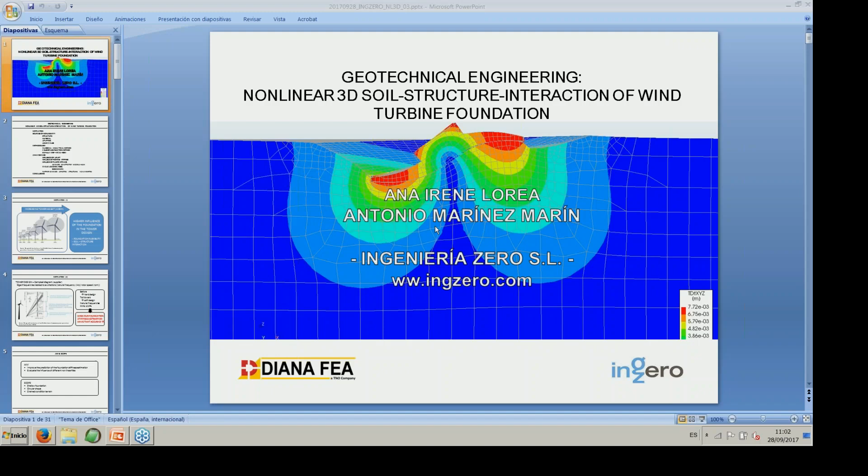As you have said, in Ingeniería Zero, we have been working for several years on wind turbine tower and foundation design. And during this process, we have come across some problems or decisions to be made based on the accuracy of the estimation of our foundation stiffness.

So let's start with the index of the presentation. I will talk about the motivation of this study, the different sources of non-linearities, the different methodologies we have, both analytical and numerical. Then we'll go on an analysis case we have done for this presentation, in which we can see the influence of different factors like uplift, the footing stiffness, the influence of plastic strains, in which we'll present the study with some advanced soil constitutive models, cyclic loading, and structural nonlinearities. And after we'll go through some conclusions.

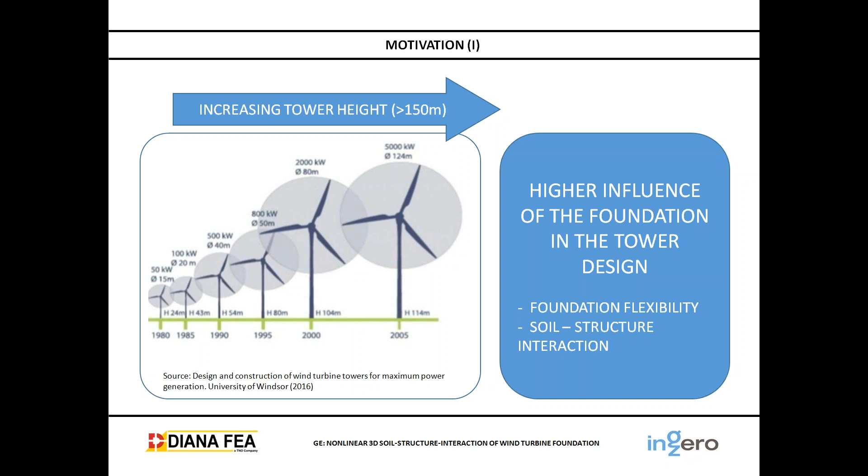Just a little note, when we start our tower and foundation design, the supplier gives us the Campbell diagram. In the Campbell diagram, we have the eigenfrequencies related to the excitations. We normally have the rotor speed, and we compare with the natural frequency of our tower.

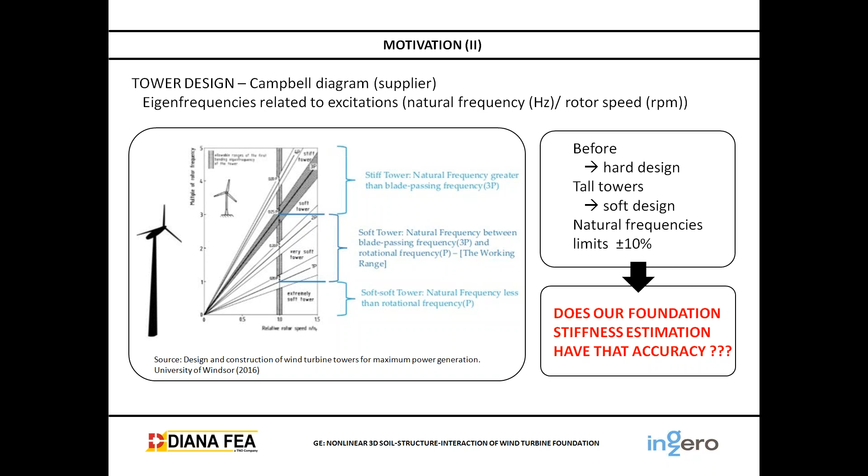Before, we had the hard design in which the frequencies were over the resonance frequency of the rotor, but as the height of the towers has increased, we have gone into soft designs because we couldn't make such stiff towers. And also the margin we have in this estimation of natural frequencies from our structure is plus minus 10%. So with such a small margin and such flexible towers, does our foundation stiffness estimation have that accuracy? We wonder, because as the influence of the foundation grows, are we near that 10%? How does our stiffness influence the accuracy of that frequency?

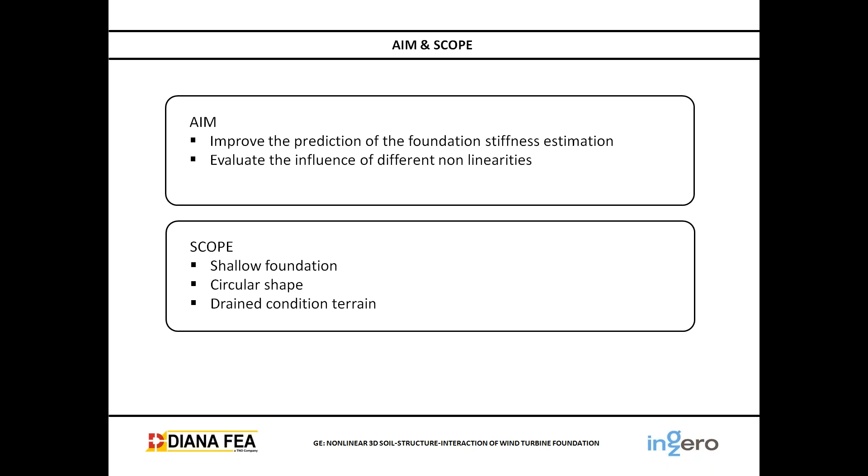So the aim of this webinar is to improve the prediction of the foundation stiffness estimation, to evaluate the influence of different nonlinearities, and our scope is a shallow foundation, a typical wind turbine foundation with circular shape and in drained conditions.

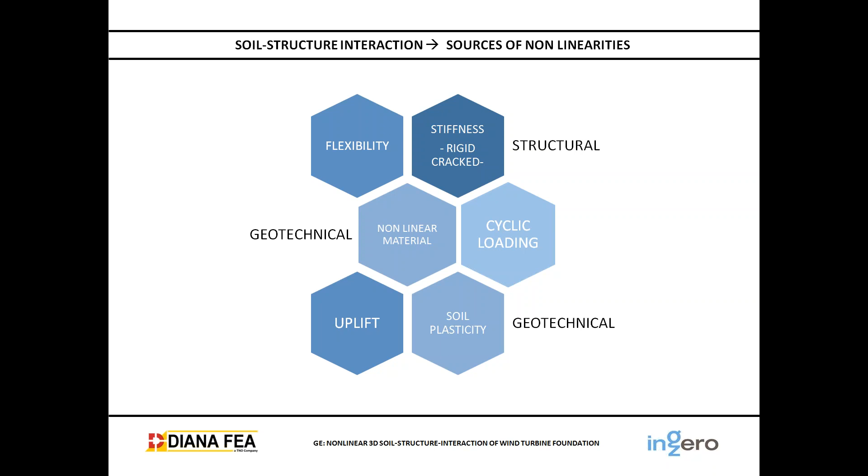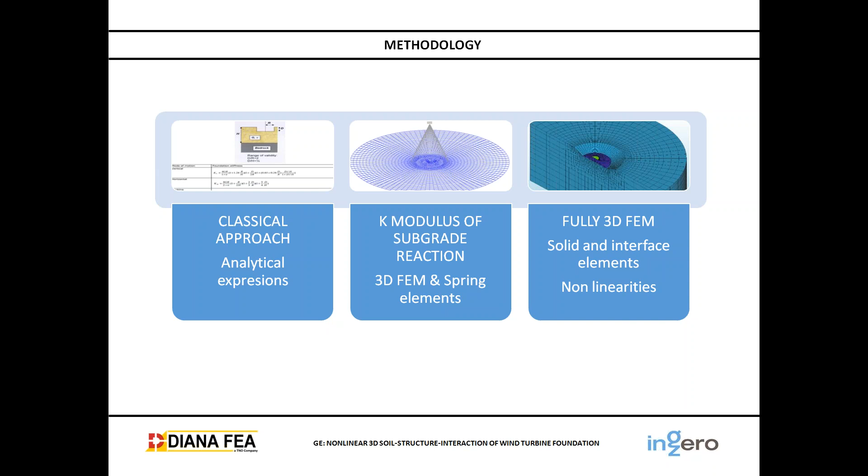Which methodologies do we have, or how do we face that problem? Normally, we have the classical approach, which is an analytical expression found in all guides and standards. We have three methods: the analytical one, which is the classical; the second big group, in which we consider the 3D FEM models, and in it we have two subgroups. One in which we represent the terrain with the modulus of subgrade reaction, by spring elements, and the fully 3D FEM, in which we represent it with solid elements and interface elements. We represent the interface between soil and structure, and it can include all the nonlinearities, general shape of the foundations, construction process, etc.

So let's have a quick look at the classical approach. Here we have an example of the DNVGL guide. It's based on an analytical expression, and it's included in standards and guides. The variables we use to represent the foundation and the terrain are the equivalent dynamic shear modulus and the Poisson's ratio, and of course, the foundation geometry. The pros of this method are that it's very simple and fast, and you can have a direct measurement of soil parameters in order to determine the parameters you need to use the method.

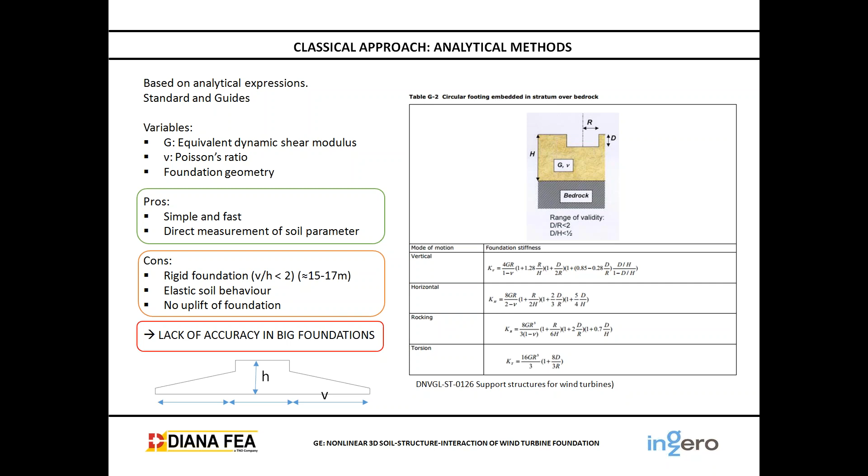The cons: it is for a rigid foundation. We know that a rigid foundation has a relationship between the depth and the dimension of the cantilever of around 2. So it's valid in the range of footings of 15 meters. But nowadays we are reaching 19, 20, 21 meters. The other con is that you consider an elastic soil behavior, and it doesn't consider the uplift of the foundation. So we can say that it has a lack of accuracy in big foundations.

On the methods that use the modulus of subgrade reaction, we introduce spring boundary elements which are based on that subgrade reaction modulus. We can either use shell or solid elements. The variables we introduce are the modulus of subgrade reaction and the foundation geometry. In these methods, we can include the stiffness of the foundation itself.

The pros: it considers the uplifting, because we use gap elements or spring elements with a gap. It has nonlinear behavior. It has a low computational cost. On the cons, we have to obtain the subgrade reaction modulus by correlations, so we don't have the terrain represented by a direct parameter measurement. And also, as it's based on correlations, we have the scale effects on the test. So sometimes we need to calibrate that model.

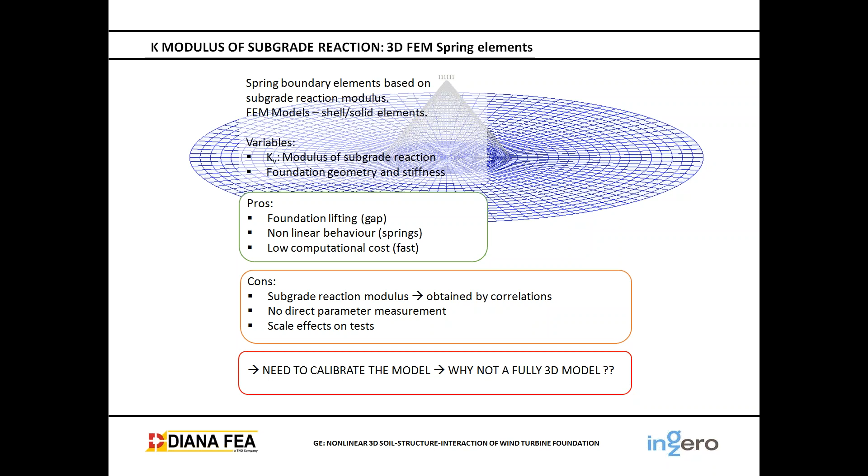So if we need to calibrate the model, why not use a fully 3D model? So let's go to the 3D model. These models, as we can see here in the image, done with DIANA, are based on a finite element model with solid elements, with which we represent the terrain and also the foundation. We can see here in different colors all these elements, and we introduce interface elements between the structure and the soil, and we model or simulate the soil with constitutive laws.

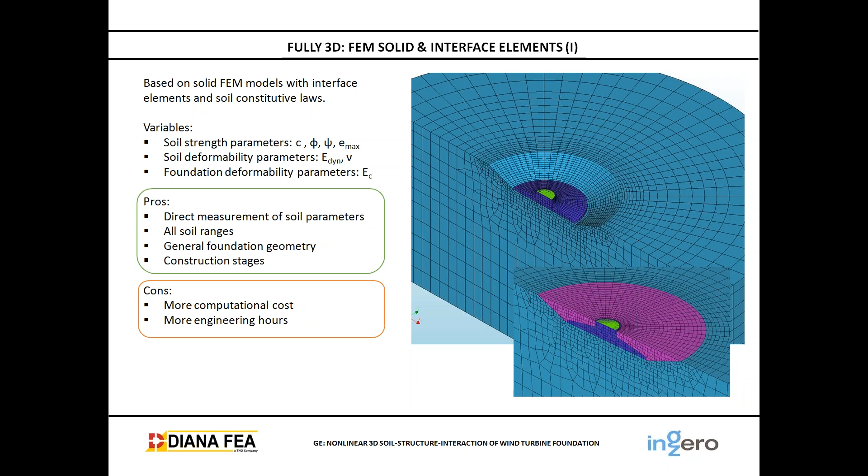Here we have the variables we use: the soil strength parameters, the soil deformability parameters, and we also include the foundation deformability parameters. The pros of using this method are that we can define the parameters of the soil with direct measurement of soil parameters with testing. We can use it in all soil ranges. We can have a general foundation geometry, and we can also include the construction stages. The cons could be that it has more computational cost and you need more engineering hours to do it.

What about the constitutive laws we can use in these 3D models? We can use a lot of them, but what we have used in this study are two different models. The Mohr-Coulomb model, which is an elastic, perfectly plastic soil behavior model. We have here the graph which represents the behavior of the soil and the parameters we need to define it.

The cons of using this soil model are that it has a constant load and reload modulus, as we can see in the graph. The modulus should be adjusted to the operational range you expect. As we know, in turbines, we have different ranges of loads, the initial ones, the maximal, the operational ones, and this soil model adjusts better with sands soils.

There is another advanced soil model, which is hardening soil small strain, which has a nonlinear stress-strain relation. Here we have the graph which represents the behavior of the soil, and the cons we can say about this model are that you need more geotechnical testing in order to define the parameters.

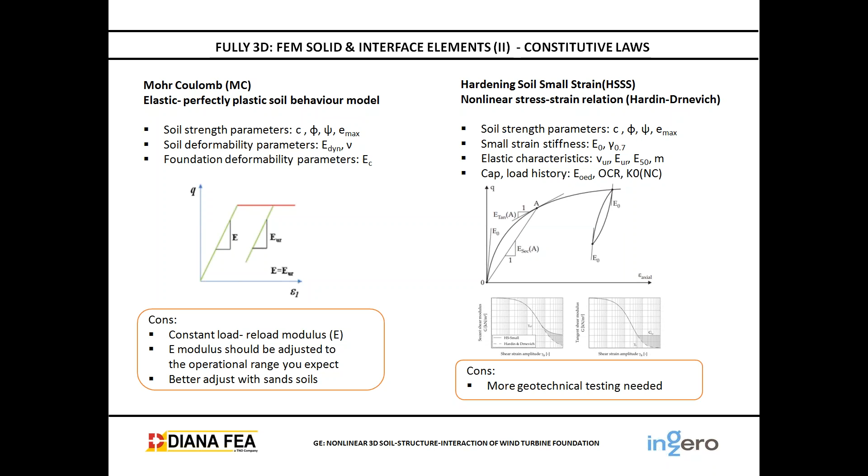So here we have a matrix in which we compare the three different methods with the different nonlinearities we believe are important when designing a foundation. We have the classical approach, which does not consider gap or uplift, nor the foundation stiffness, nor the soil plasticity, nor cyclic loading. We have the modulus of subgrade reaction method, in FEM models, that considers the gap and uplift and the foundation stiffness, but doesn't consider soil plasticity nor cyclic loading.

Then the fully 3D FEM models, depending on the constitutive law of the soil: we have Mohr-Coulomb and hardening soil small strain. Mohr-Coulomb doesn't include cyclic loading because it has the same modulus for loading and reloading or unloading, and hardening soil small strain has all the nonlinearities included.

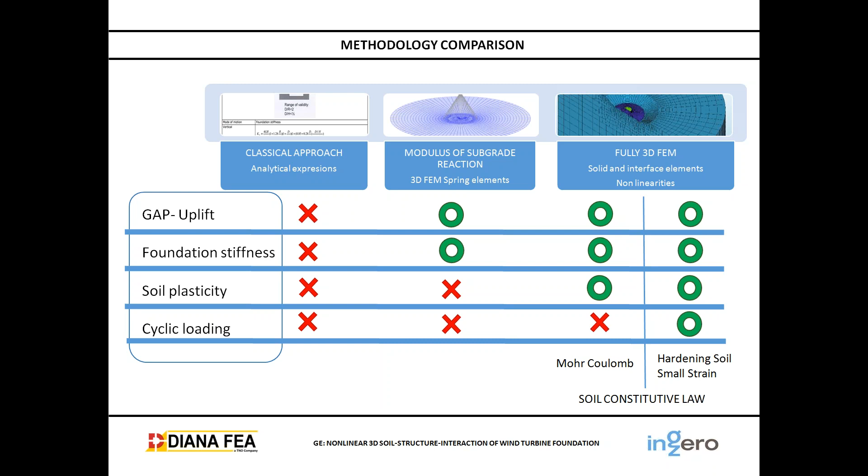Here we have made a summary of the methodology comparison, the things we have talked about before. The pros of the classical approach are that it is simple and fast, and you determine the parameters with direct measurement, but it lacks accuracy in big foundations. With the subgrade reaction, we obtain the subgrade reaction modulus by correlation, so sometimes we need to calibrate the model. And the 3D model: we have the cons of Mohr-Coulomb, but with hardening soil small strain, it is just more time consuming.

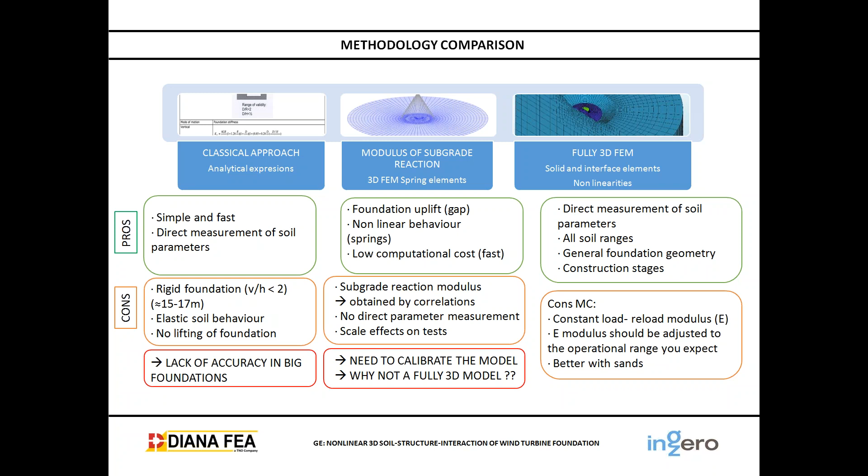So let's move to the analysis case we have made.

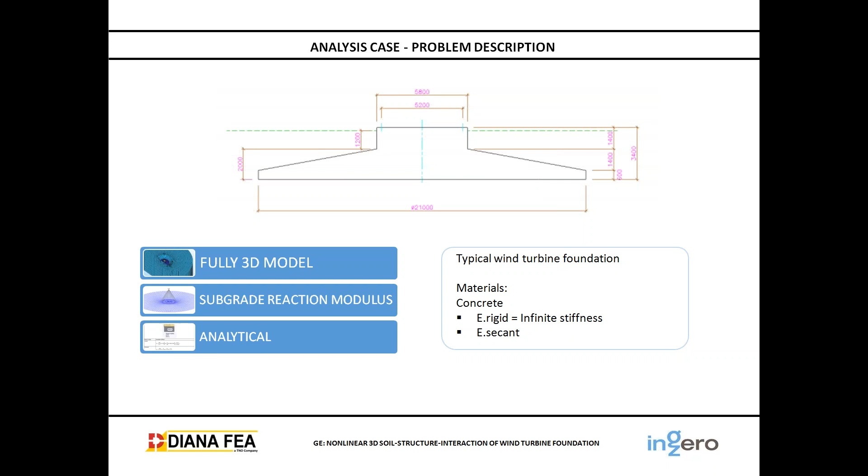Okay, we have simulated a typical wind turbine foundation, a circular one with 21 meters, and the material is reinforced concrete, and we have studied its behavior with infinite stiffness of the foundation, or the secant, which is the elastic one. Now we study the different nonlinearities of the different factors with the different models.

So what about the influence of the uplift of the foundation? Here in the graph we have the moment versus the rotational stiffness. We have a simple line, which is the determination of the rotational stiffness with the analytical method, and now it is compared with the subgrade reaction modulus method. The blue one is considering the rigid foundation, and the orange one is considering the flexibility of the foundation.

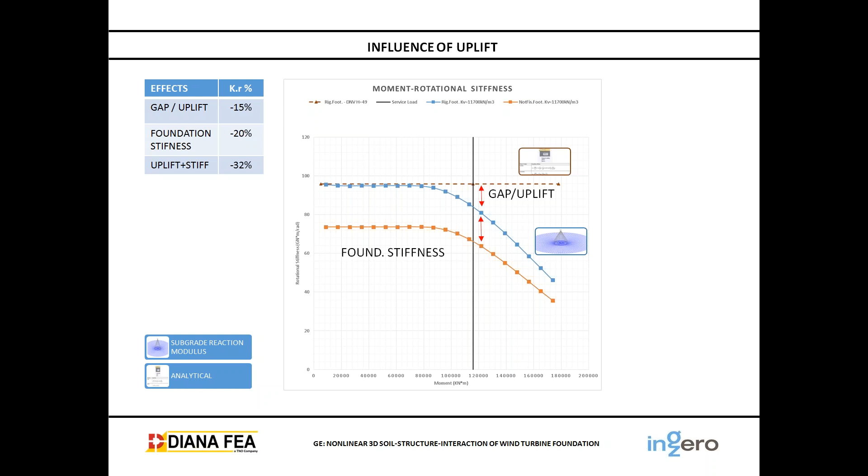So we have the Young's modulus of the concrete. We can see here the decrease of the rotational stiffness. If we consider the gap or the uplift, it has a 15%. If we consider the foundation from rigid to flexible, we have a 20%, and in total, the comparison between using the analytical and the flexible nonlinear spring support base, we have 32% of error determining that rotational stiffness.

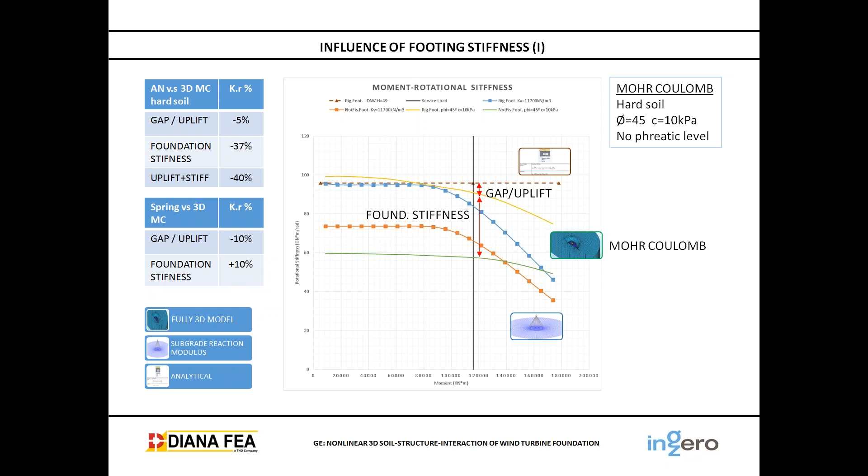So what we are observing here is that it is much more important to consider the footing stiffness than the gap or the uplift. But what we can say is that with the analytical method, we are overestimating the rotational stiffness up to 40%.

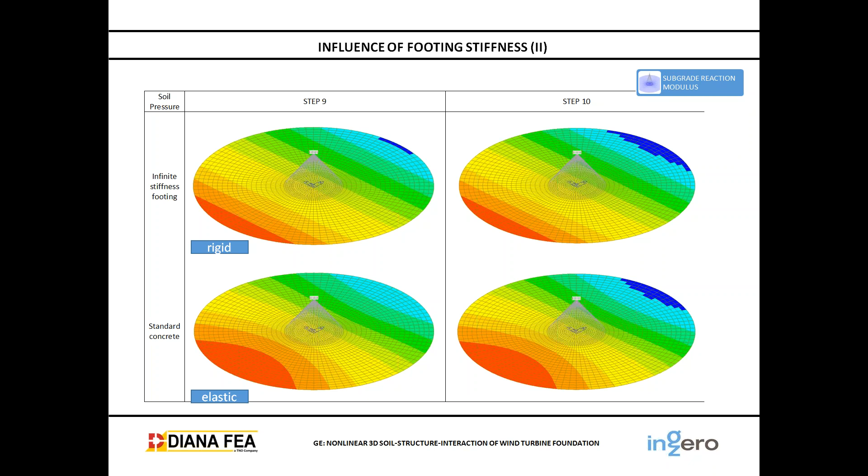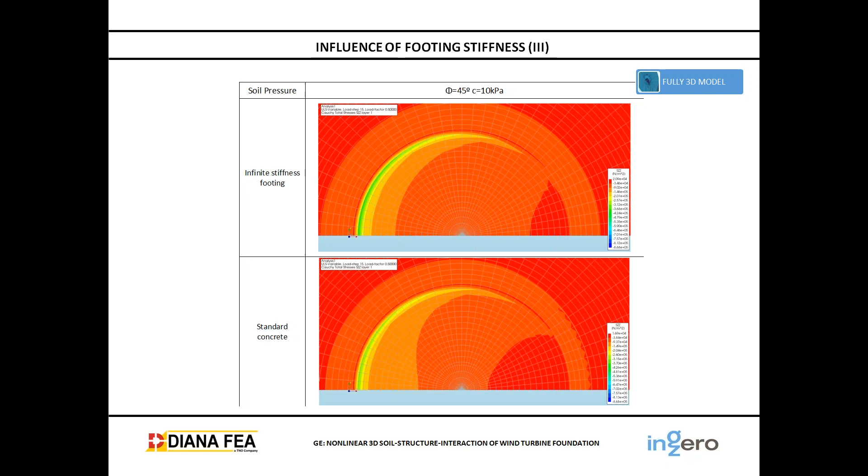Here we have some images with DIANA with the pressures in the footing. The two first images are with infinite stiffness, so a rigid foundation, and an elastic foundation. We can see how the pressures on the soil change by considering the flexibility. Here we have the Mohr-Coulomb 3D full FEM model, with infinite stiffness and with elastic footing.

How does the plastic strain influence? Here we have included the plastification or plastic behavior of the soil by considering a medium soil. So these are the results. In the graph, we can see the results of full 3D methods with a Mohr-Coulomb for a hard soil and medium soil, and with a rigid foundation or a flexible foundation.

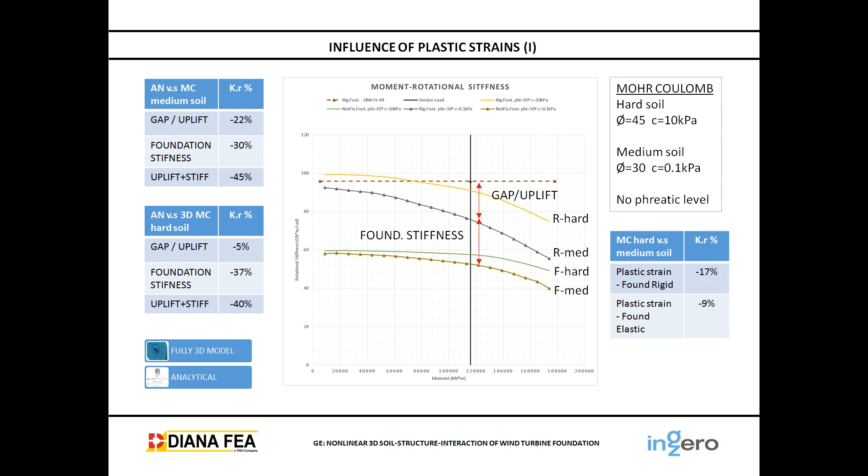We have here the graphs, and the variation versus the analytical one. We have 22% from the uplift, 30% from the foundation, and a total of 45% decrease of the rotational stiffness. That was with the medium soil; with the hard soil, we have 5%, 37%, and a total of 40%. So we are around a 40 to 45% decrease in our rotational stiffness estimation.

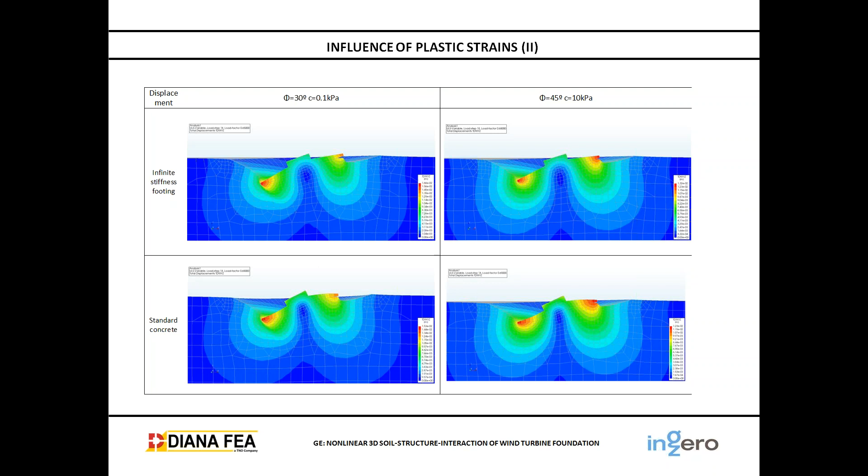Here we can see some images of the results obtained by DIANA. In the upper part of the slide is the infinite stiffness footing. We can see how it maintains its plane, and for a medium and a hard soil with a flexible concrete, we can see how the flexibility and the deformation influence the deformation of the system.

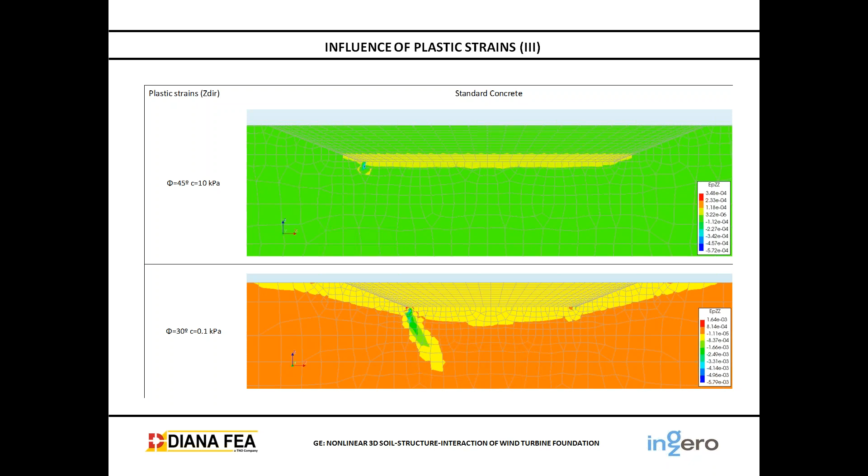Here we can see the evolution of the plastic strain in the terrain for a hard soil and for a medium soil. Maybe the difference between the values is not very high, but we can see how the plastic strain propagates in the soil.

And here a full 3D model, but using advanced constitutive models, which is a hardening soil small strain. In the graphs we have included the orange one, the model with spring elements; you can see on the right side the hardening soil. The blue one is the hardening soil with a hard terrain, and the green was the Mohr-Coulomb.

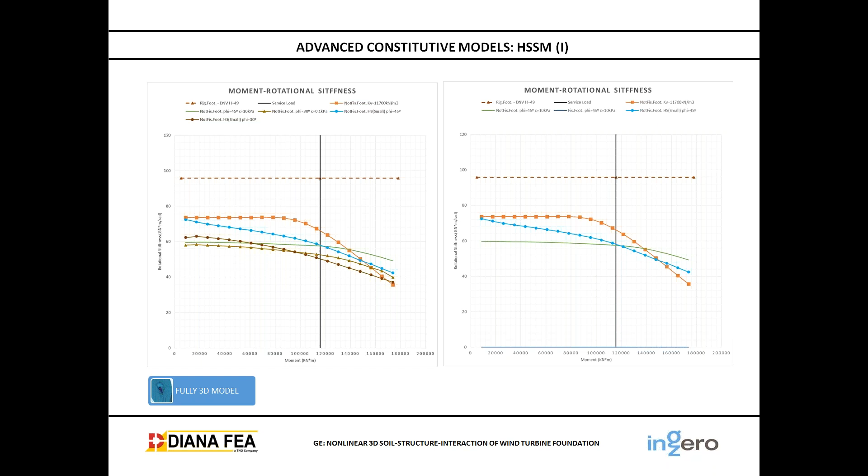We can see that in the beginning, for low moments, the behavior is quite different, but from the service loads, the black vertical line, which is the operational moment or operational load, it has a very similar behavior.

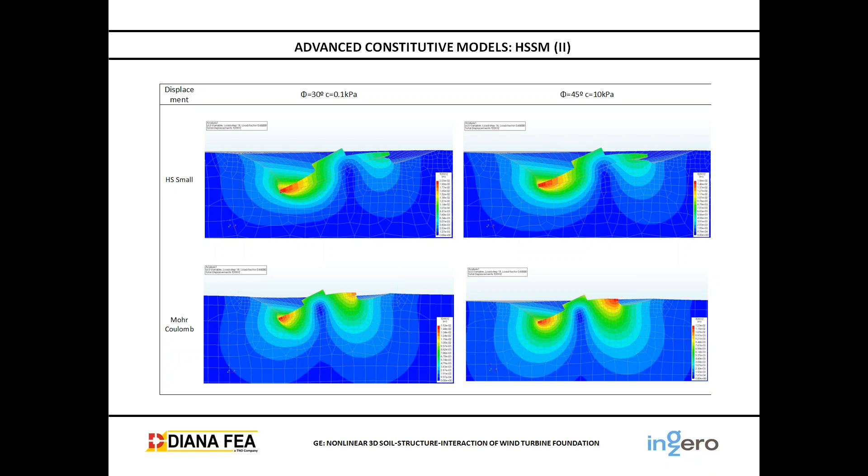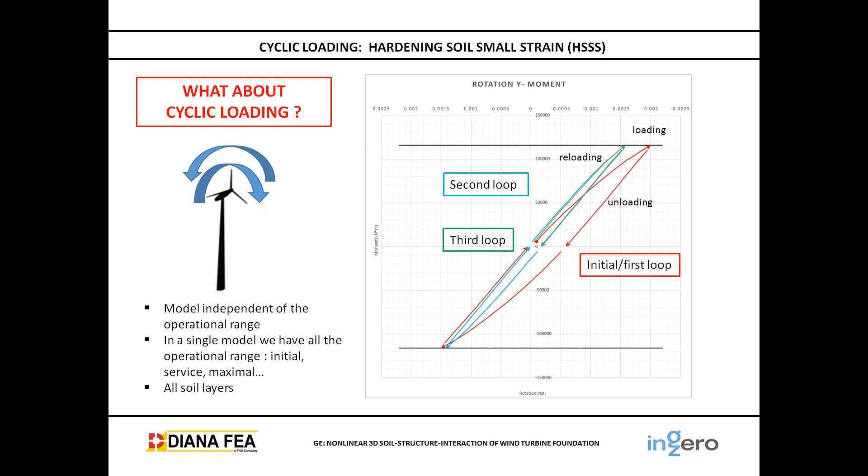So what's the point of this? That we have in a single model the whole operational range, the initial, the service loads, and the maximums, and we can have all the soil layers. So we have a model which is independent of the operational range. That's quite good because it seems that we have solved our problem. But now, how can we believe that? We can't just say that it's true. So how accurately can cyclic loading be predicted? Let's do a benchmark in order to know how accurate we are.

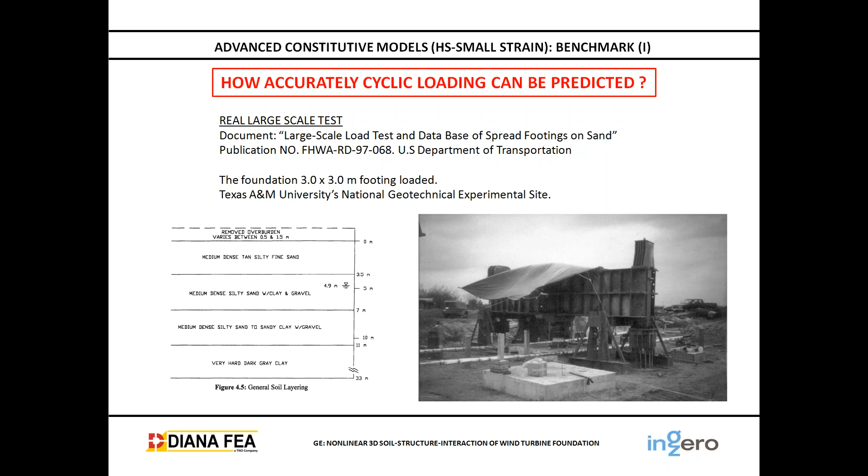We have taken a real large-scale test, documented in "Large-Scale Load Test and Database of Spread Footings on Sand" from the US Department of Transportation, which is a foundation of 3 by 3 meters, and it has been loaded according to that image. It has this soil layering, and we have made the same. We have reproduced and simulated that test with Diana. We have introduced the same general soil layering, and we have loaded, reloaded, and made the cyclic loading they have done.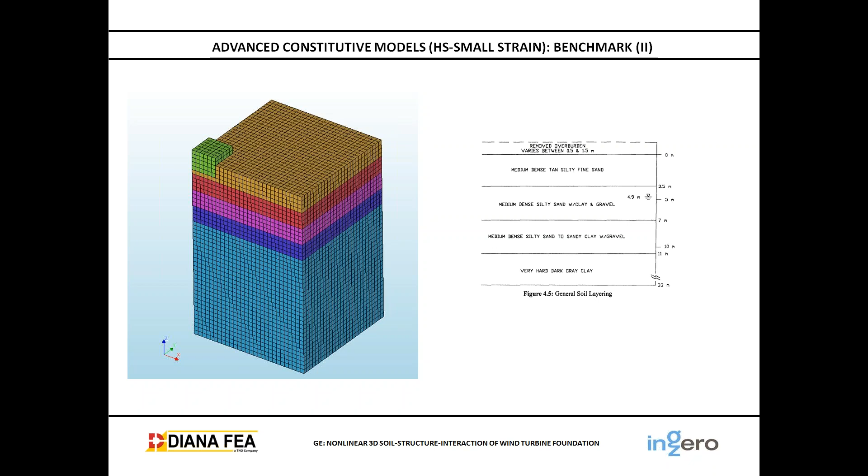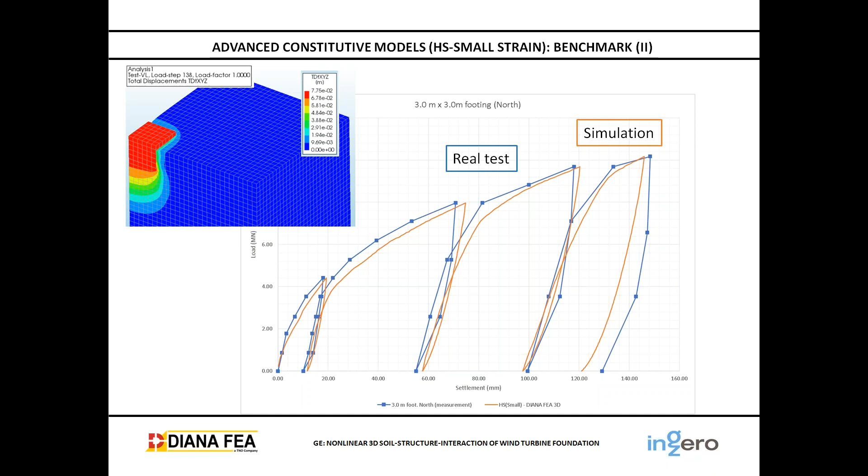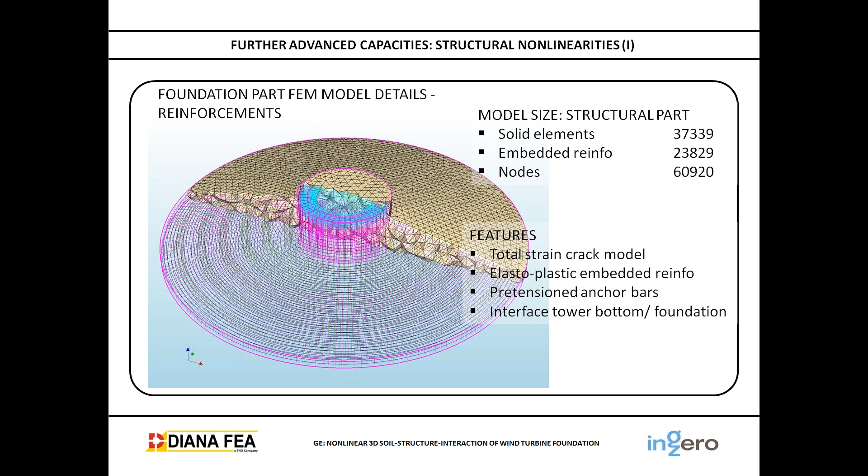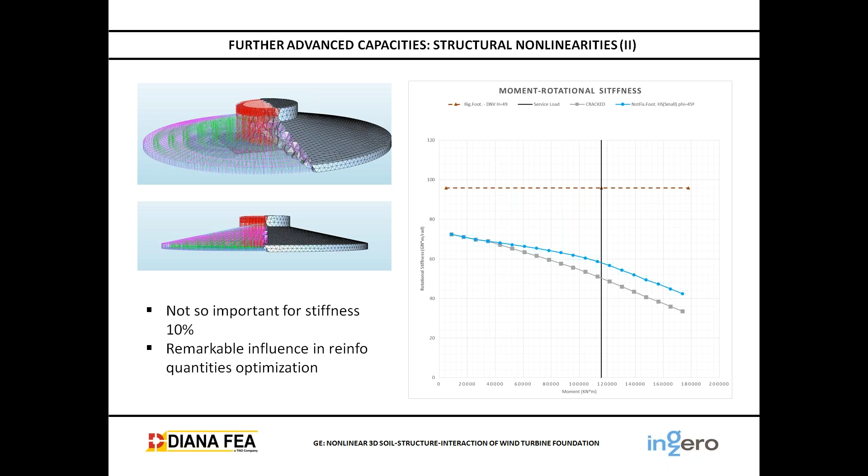There are some studies that say it can optimize, of course depending on the footing and on the loads, up to 20 or 30%. Normally, in the cost of wind turbines, the foundation is 10% of the cost of the whole structure. So it's quite significant.

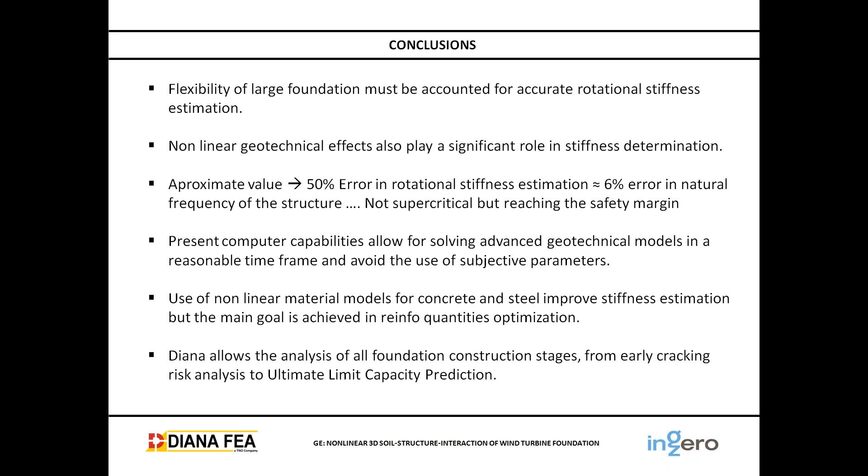Present computer capabilities allow for solving advanced geotechnical models in a reasonable time frame and avoid the use of subjective parameters. The use of nonlinear material models for concrete and steel improves stiffness estimation, but the main goal is achieving reinforcement quantities optimization. And Diana allows the analysis of all foundation construction stages, from early cracking risk analysis to ultimate limit capacity prediction.